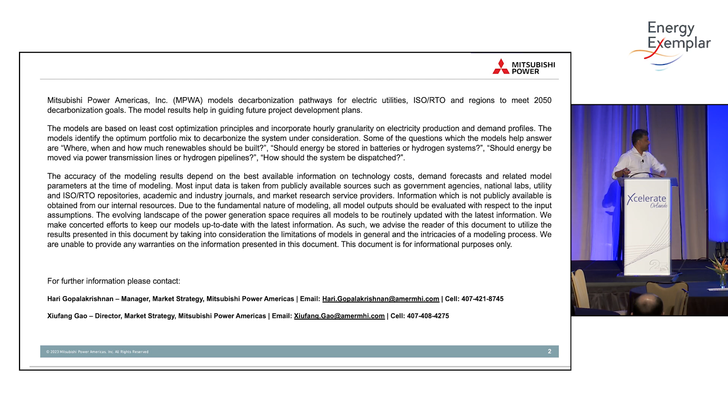All right. So the fundamental problem in ERCOT, and one of the reasons why we chose to analyze ERCOT: ERCOT is an islanded system. All the resources are inside, all the demand is inside. So pretty easy to analyze from a modeling perspective. So what is the problem statement? Before embarking on any modeling exercise, first state your problem. The problem statement: what is the cheapest way to achieve 100% decarbonization by 2050, given the conditions in ERCOT?

You have 4 regions: west, north, south, and Houston. The renewable resources are in the west and south, but your load pockets are in north and Houston. And also today the system peak load is around 80 gigawatts, and that's going to increase to 105 gigawatts by 2050. So that's a given condition.

Problem statement is, so where, when, and how much renewable should you build? So we're talking about decarbonization, how to achieve zero emissions. So how much do you build, where do you build? How do you store that energy? Because in this particular case we're talking about intermittent renewables, so obviously it comes with storage. How much, when, where, how you should build that.

How do you move that energy? Do you move it via power transmission lines? And these distances we are talking, it's upwards of 400 miles from source to sink. So these are typically going to be done with HVDC lines. So how do you move it? Either you do HVDC lines or do you do hydrogen pipelines?

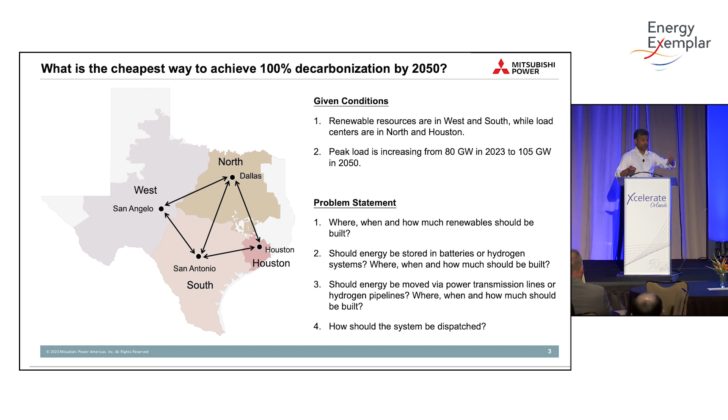And one more thing I will add over here, the modules in Plexos that we have used: because we are dealing with electrolysis-based hydrogen, and hydrogen is a gas, we are obviously using the power module, we are using the gas module, and we are also using the water module. And maybe next year when I come and present, I would have included the universal module, because we are doing carbon capture modeling now, and that's going to be in the universal class.

Okay, so the quick executive summary, 4 slides. This is what you're dealing with, your power system. And what it encompasses over here is all known and available power generation conversion technologies. I'm not going to go through everything because typically this presentation takes me an hour or so. The point I want to make over here, you can see you have the power side, the gas side, you got water, so that's why all 3 Plexos modules. Carbon capture, you have it over there. We'll model a pathway with the universal module.

The point I want to make about Plexos is you can use the available objects in the power module, gas module, water module. Mostly the power module, you can use the objects if they're available directly, like for example, generating unit. But if it's not, you can do an implicit modeling. So you can either model it explicitly or you can model it implicitly. Because at the end of the day, what's behind these objects is energy and mass balance equations. So there are ways you can juggle things around.

If you don't have the right object, if you don't have a carbon capture object, well, I can actually mimic that using 2 or 3 linear combinations of other objects. It's possible to do that. But across the 3 modules, as a modeler, it gave me a tremendous amount of flexibility to model some of the real world components, either implicitly or explicitly. Okay.

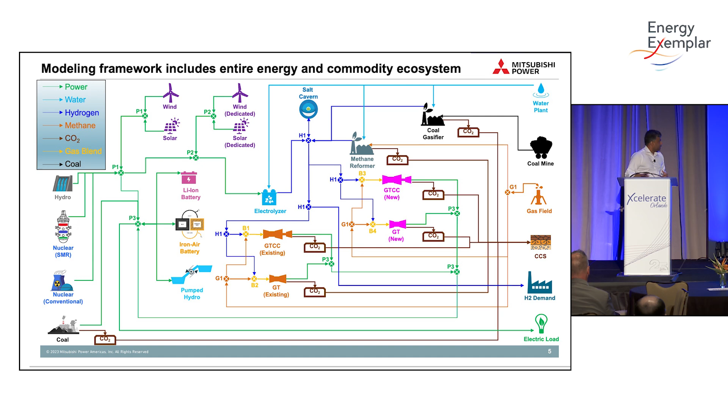So when we call decarbonization pathways, we are going from today, 2023, all the way to 2050. Today the ERCOT system is around 124 million tons of carbon dioxide emission. Just for reference sake, the entire United States is 5,000 million tons. So you have to take that system, and by 2050 you want to be a zero carbon system. So you can model different pathways.

So pathway one, which is actually happening as we speak, in the past 5 years and this decade, is you keep adding more and more renewables, and you firm it up with lithium-ion batteries. So that's your pathway one, that's our baseline pathway. Now on to that, we add hydrogen storage.

And why hydrogen storage? Because at Mitsubishi Power Americas, we are heavily focused on using hydrogen-capable gas turbines. Pair that with electrolysis, pair the electrolysis with curtailed renewables, and you have a storage solution, which actually is an apples-to-apples comparison with batteries. And again, hydrogen as storage does what is called seasonal arbitrage, whereas battery is suited for daily arbitrage. So when we model, we see the benefits of incorporating some amount of seasonal arbitrage in your portfolio. Okay, so that's our pathway two.

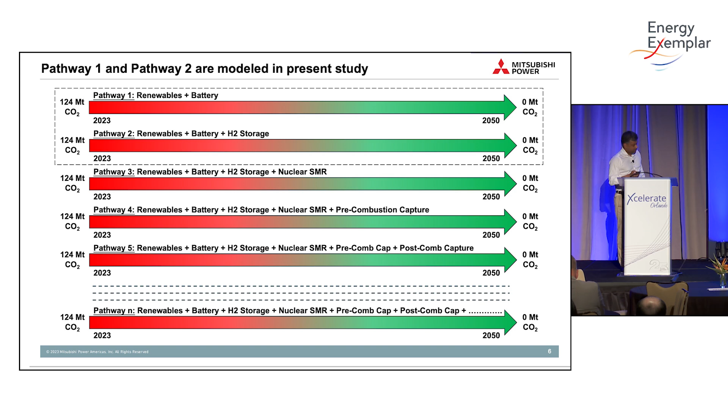Now pathway three, and again, I haven't modeled it yet, we'll do that sometime this year. You can add nuclear SMR, then you can add pre-combustion capture, post-combustion capture, and n number of combinations. And the theory of least cost optimization is you put all these options in, you run linear optimization, and you find out what's my least cost portfolio solution. And that's what we should go out and build. So today we'll talk about path one and path two, okay?

Okay, so given this emission trajectory, this glide path, 124 million tons today going down to zero, the emission of both pathways is the same, so that's the constraint we put in Plexos. The constraint is the emission constraint. Given the same emission pathway, what we see is pathway one results in a terminal power price, which includes the energy, the generation price, and also the long distance transmission component, of $53 a megawatt hour.

So the system is fully decarbonized. The only primary energy resource you have is wind and solar. The only firming technology you have is lithium-ion batteries, and we have three classes, 1-hour, 4-hour, and 10-hour. The resulting power price is $53 a megawatt hour. If you include hydrogen in that mix, the seasonal arbitrage ability actually reduces your power price by $11 a megawatt hour. And that's the value proposition of long duration hydrogen. Okay. All right.

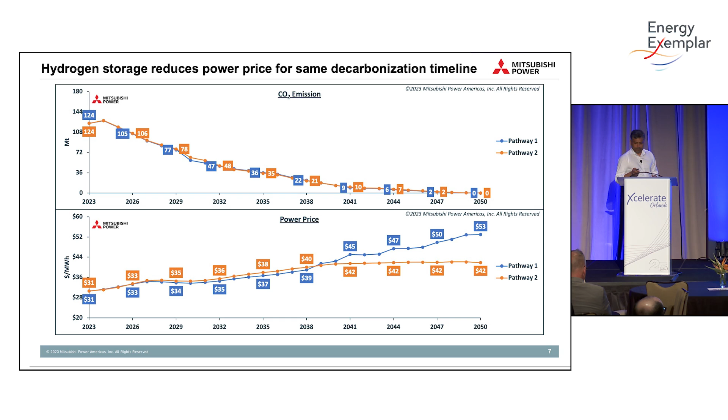And why? So that power price is a function of what the total system cost is. Now, in Plexos, when you're doing minimization, you're minimizing the sum of total system cost: CapEx plus OpEx, plus VOM, plus FOM, and your fuel cost. So you can look at the system today in pathway one. As you start decarbonizing, you're going to keep incurring more and more new build, new CapEx costs. So over that whole horizon of 28 years, your total system cost is $914 billion, almost $1 trillion.

Compared to pathway two, that seasonal energy arbitrage dynamics helps you avoid some of the renewable overbuild. A very simple explanation: when you think about the 8760 time period of a year, you have your peak load, let's say it's happening on July 15, 6 p.m. And if your system is doing only daily arbitrage with batteries, you're only moving energy within a 24-hour cycle, so that primary energy has to be harnessed in the same day. Therefore, your renewables have to be overbuilt in order to capture that much energy to meet that peak load.

Whereas when you do seasonal arbitrage, you don't need to size your system for that peak load day. You have a lot of curtailments, otherwise unused energy in the shoulder months, and you can shift that over the months, and that helps you avoid the renewable overbuild. So that's where the saving comes. You can look at the build cost savings between the two. Altogether here you are at $782 billion. So you're reducing this in pathway 2 just by including hydrogen, and this is the net saving. The cost of the hydrogen-capable gas turbine, everything is included here. So on a net basis, you're 14% lower.

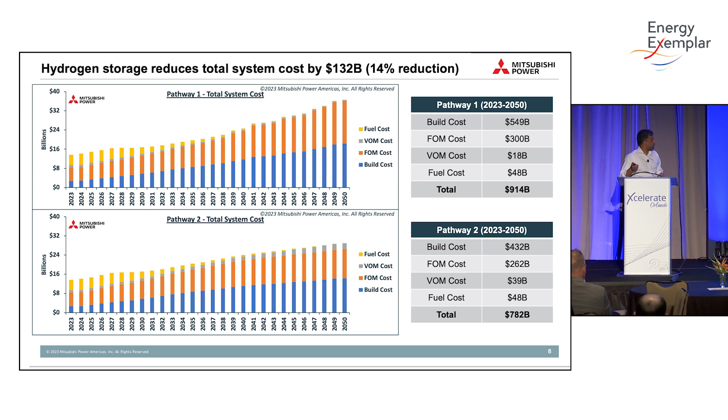Okay. I've got 5 more minutes. This is going to be a deep dive, the next few results. So you got the executive summary. And again, these are all PLEXOS results, the next 20 slides.

So again, as that carbon emission constraint keeps getting tighter and tighter, you have to keep building more and more solar and wind. And you can see in pathway 1 for Texas, altogether, your solar plus wind plus battery, you're at 489 gigawatts. And what is the peak load? 105 gigawatts. So that, by the way, is also a very general number in the North American space. The question, how much solar and wind do I need to decarbonize the system? Your peak load times 4 to 5 is roughly the number you can expect to see.

But with the hydrogen pathway, you can see I've added hydrogen-capable combined cycles and simple cycles. And on a net basis, I'm still lower. I'm at 353 gigawatts to serve that same peak load of 105 gigawatts. Okay.

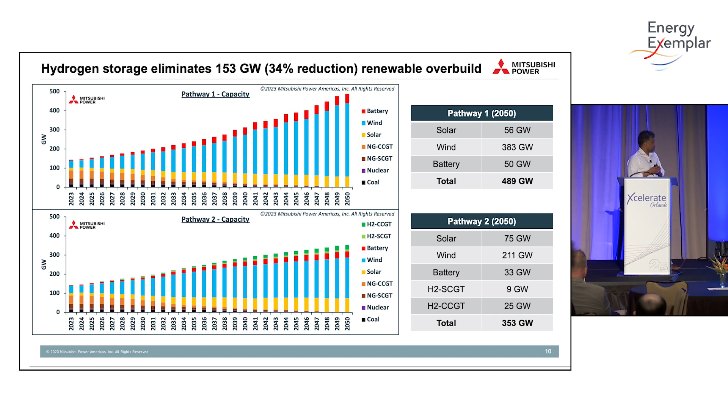So there's about 1 more minute, and I want to open it up for question and answer. We can keep it a little conversational. I'll run through everything. So these are all results coming out of the model. Tell me if anyone wants to see any particular one, we can talk about it.

I want to talk about one particular, the hydrogen system, and one of the key takeaway slides from the modeling perspective. So in this model, and I forgot to give it a name, internally we call it IDM, Integrated Decarbonization Model, you can actually do cross-sectoral decarbonization. So think about applications like ammonia, fertilizers, and so on. Here, power generation, hydrogen as storage.

As I mentioned, how it works is, this is the year 2050. In your shoulder season, February to July, when you have that abundance of renewables, which would otherwise be curtailed, that's when you run your electrolyzers. You see the capacity factor of the electrolyzers reaching up to 75%. And then in your peak load months, July to September, that's when you utilize the hydrogen and you run your gas turbines and make power to serve the load. And then ERCOT has a small shoulder season in November. So you again make hydrogen, utilize it.

Down below here, you can see the water constraint. Now, water is a big issue. You're consuming water, but when you combust hydrogen, you get moisture in the tail end. So the water is conserved. But water is seasonal, especially when you go to a place like Texas. And here we are modeling Texas West, so Permian Basin, and Texas South, Gulf Coast. So they have availability of water.

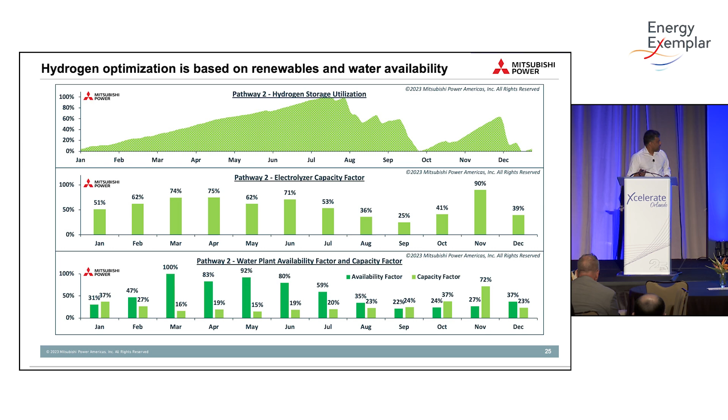Every molecule is accounted for, whether it be water, gas, power, an electron. Okay. And I will go to the last slide and then we'll stop over there. Yeah, the conclusion slide, there you go.

So finally, between the two pathways, and this is a question to the PUC in Texas and of course ERCOT themselves, what kind of system do you want in your future in 2050? Do you want to be in pathway one where you only do renewables plus lithium ion? So this is your system. You have to build out your transmission from what you have today. So you need about 27 gigawatts going from west to north, 5 gigawatts west to south. Total system price incurred over that whole 28-year horizon is $914 billion, resulting power price $53 a megawatt hour.

Compared to if you include your hydrogen, so you add some electrolyzers, you add some hydrogen storage, this is salt cavern geological storage, you add water plants, you add some combined cycle and simple cycle hydrogen gas turbines. That way you offset a lot of the renewable overbuild, you offset some of the lithium ion batteries, you move some of your power via hydrogen pipeline. So that's the other aspect we model, hydrogen pipeline using the gas module. So instead of doing HVDC lines, you can move some of it via hydrogen pipelines.

And therefore you would end up with a total system cost of $782 billion, a power price of $42 a megawatt hour. This is the question in front of the PUC, which one do you want? Do you want to be in that system or this system? And obviously, consumer price theory is like, you want the lowest cost, lowest power price to the consumer.

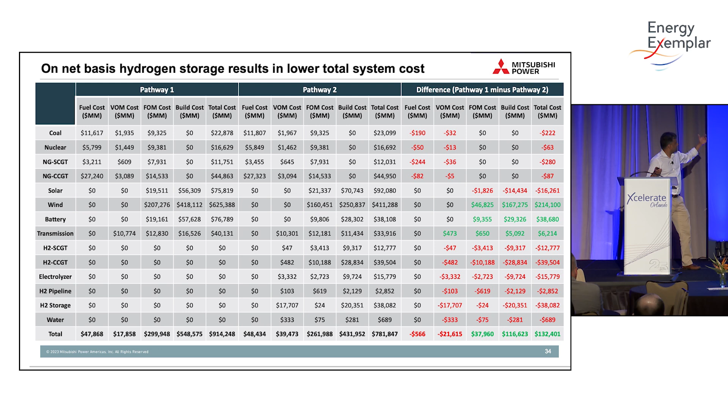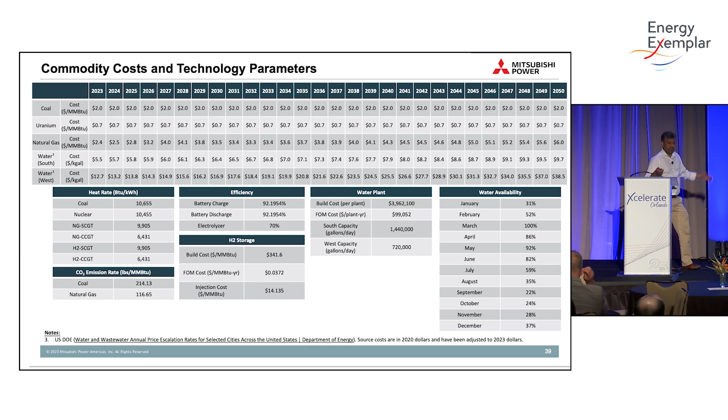Okay, so the rest is all the accounting table. And assumptions, we typically use NREL ATB, SNL, IHS. There are some DOE studies on water availability. All of this is public domain information. Nothing is confidential to Mitsubishi. So you can cite this. These are the sources. And that's it.

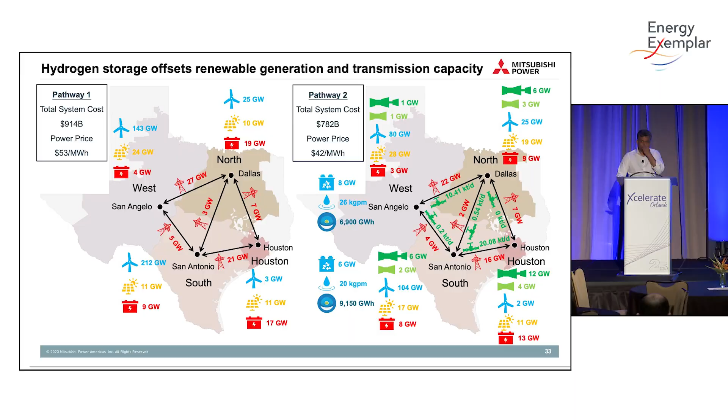Mike Horshak from Charles River Associates. I was just wondering, what was your assumed supply level of water? Did the model just assume if you paid the price, the water would be there, or did you put in some volume constraint in this analysis? It's a physical constraint. It's not elastic to water price. So based on seasonality, you actually have a limited amount of water available. So it's kilogallons of water each month.

And actually in the real world also, just because I can pay a higher price doesn't mean I can have more water. The water has to exist. So I hope that answers your question.

Yeah, Nathan with E3, just a question. You said 3 to 4 weeks for a solve time. I'm wondering what kind of infrastructure you use for running the model, or if it's on the cloud. Yeah, we don't use cloud, so we have an internal machine. The issue why it's 3 to 4 weeks is because it has to run sequentially. So you have to solve 2023, 8760 granularity, move on to 2024. And that's why it takes so long.

And as I mentioned earlier, when you run fitted chronology, you're doing LT and ST in the same problem. So you're getting dispatch and capacity expansion. So it's a complex problem. So by nature, the computing time is higher. And we can't really solve the next year until this year's solution is solved.

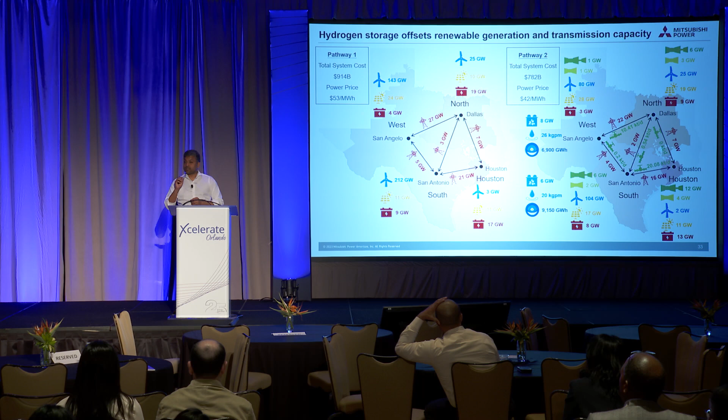right? Right. So the electrolyzer load is decided by the model. The model decides how much electrolyzer to build and when to run it. That is decided by the model, and that is decided based on when the curtailment happens. Yeah. Let me put this: I'm not fat fingering anything in this model.

The only inputs that go in are those assumptions which you saw, which is basically just cost information: CapEx, build cost, FOM, VOM, fuel cost. And there's no fuel, hydrogen is not a fuel over here. Hydrogen is a gas.

And you run it, and basically once you start the simulation at 2023, there is no interruption, there's no fat fingering. It takes the solution from the previous year, sees, okay, this year I have to reduce my CO2 emission by so much, so I need to build so much more, and then I need to run so much more, all the way out to 2050.

So you've got a really interesting problem here where, effectively, you've got a system with no fuel cost, just variable O&M at the end of the build out. ERCOT's an energy-only market, hypothetically. At some point, does the question of whether that's the right market structure really come into question? Because you've really got just a fixed cost recovery situation. I guess kind of a little off the topic, but.

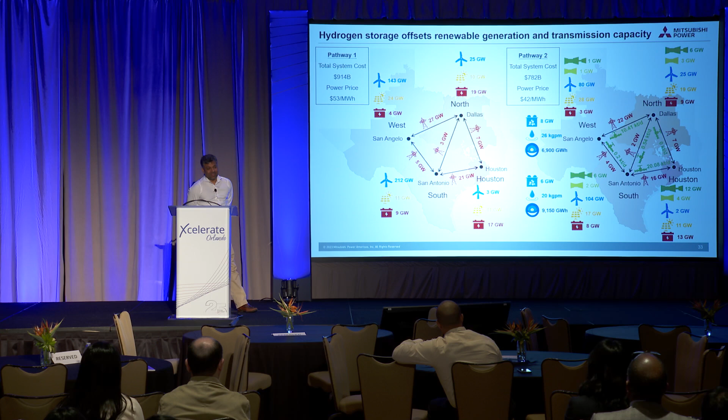No, absolutely. Actually, I was having lunch with one of the ERCOT markets people. It's like, all good, but hey, we are energy only and most competitive. We want cheap energy and we don't really care, in our markets, what the emissions are. So let me ask you, or the audience, in return, right? So we want to decarbonize, okay? No one's arguing. I mean, ERCOT, okay, let's leave aside.

The reason we chose to study ERCOT is, first of all, modeling-wise, it's very easy for me because it's an islanded system. I don't have to run the whole EI or the whole WECC. So that's one. The other is, if you look today, the most critical markets where proof of concept has to be established for any technology are ERCOT, Texas, Germany, and Japan. No offense to Australia, Energy Exemplar.

So Germany, Japan, and Texas, if you can solve these three markets. And again, from our perspective, we are an OEM, so we have to build those products. So we have to first find out which product is the most reasonable one. So that's why we chose ERCOT.

Now your question, what ERCOT does. If they say, hey, thanks, great simulation, but we don't care about decarbonization, so be it. Then the existing market continues. But if they say, okay, we do want to decarbonize, eventually we want to be a zero carbon system, then they have to change their market construct.

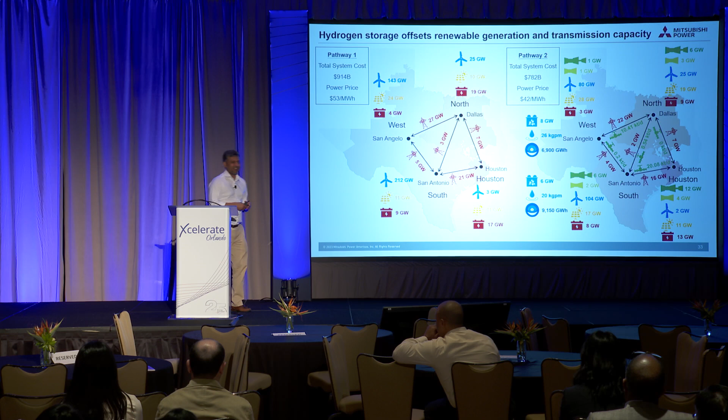This current construct is not going to work, where you bid the lowest, you bid your short-run marginal cost, and the profit margin you pick up is the difference between your short-run marginal cost and the highest bidder. That simply is not going to work if you want to decarbonize in the future. So I hope that answers your question, or at least gives some food for thought.